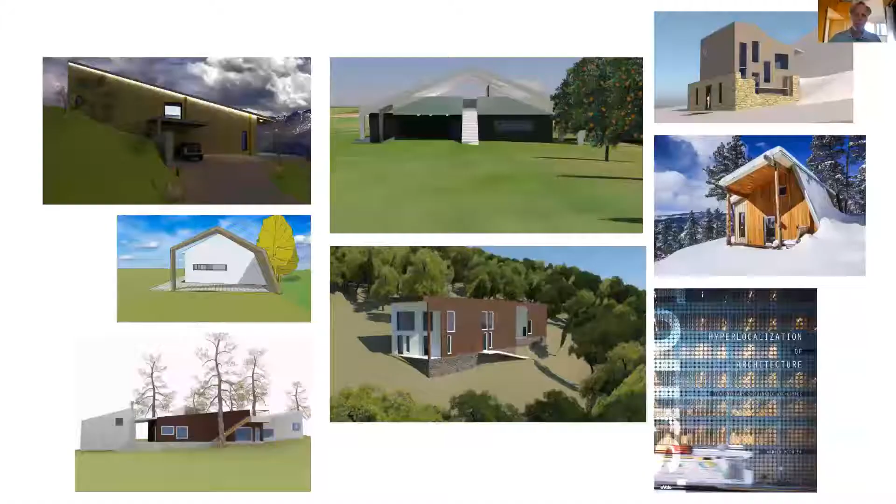My firm's called Hyperlocal Workshop. Some of the work I've done is mostly in the residential area. I'm working on projects from New York to California and Colorado. Happily, they're all certified projects, and all the clients are extremely keen on not just certification, but the quality of the building themselves and the quality of the space. So we look to have a really well-rounded, aesthetically significant type of design. It's experimental, but very much based on place. And Passive House works very well with that, of course, because it's so climate interdependent.

I also wrote a book called Hyperlocalization of Architecture that was published maybe 6 years ago. It's available in Europe and just about anywhere in the world. And it's also a book on global projects around the world, specifically around the idea of hyperlocalization of architecture, which means how does contemporary architecture work with both the culture and the place, both environmentally and aesthetically and functionally.

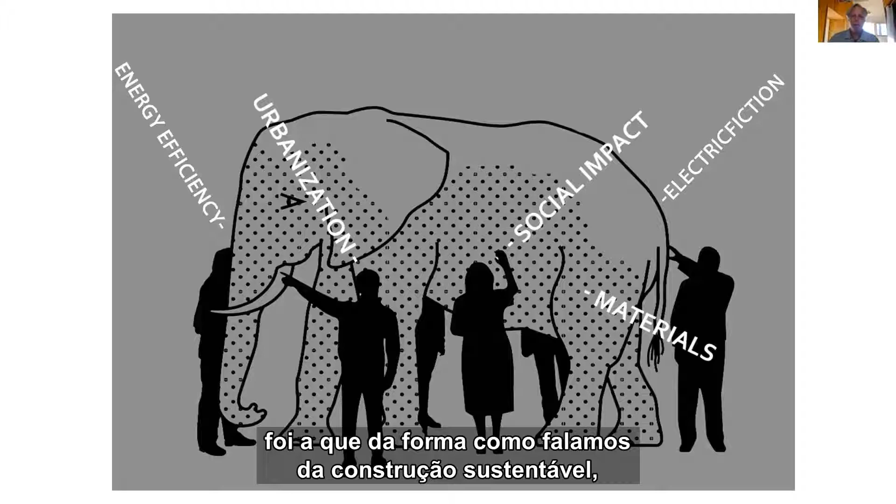And one of the things I've learned over the past few years was that the way that we talk about what we call sustainable building, green building, resilient building, all these terms are often based on very specific terms that are near to perhaps our own professional goals or professional needs. But buildings are really quite complex. Cities are even more complex in the integration of buildings and cities and in places.

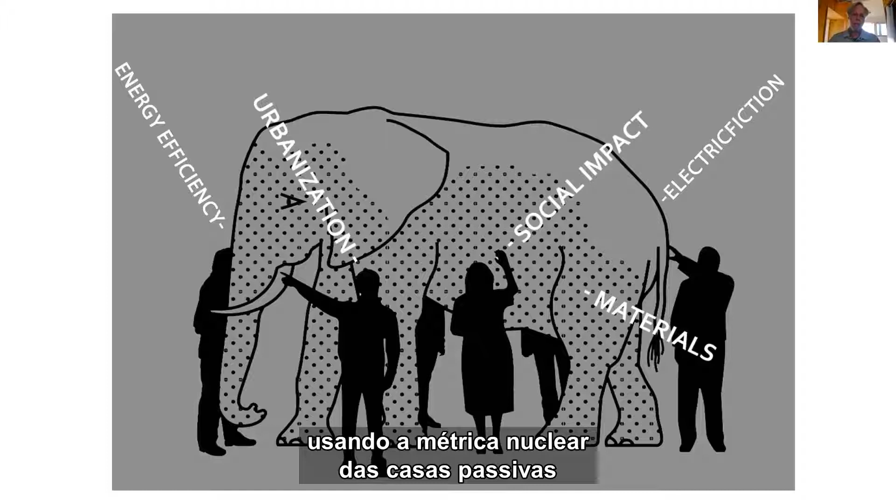So the way I want to look at talking about buildings in this talk is a broader sense of what building design does, using Passive House as the core metric, as well as carbon. Passive House, even though, as we know, it's an energy standard, it covers significant other things around the health and well-being of occupants. But the social impact, the idea of urbanization, density, the materiality of buildings is just as critical.

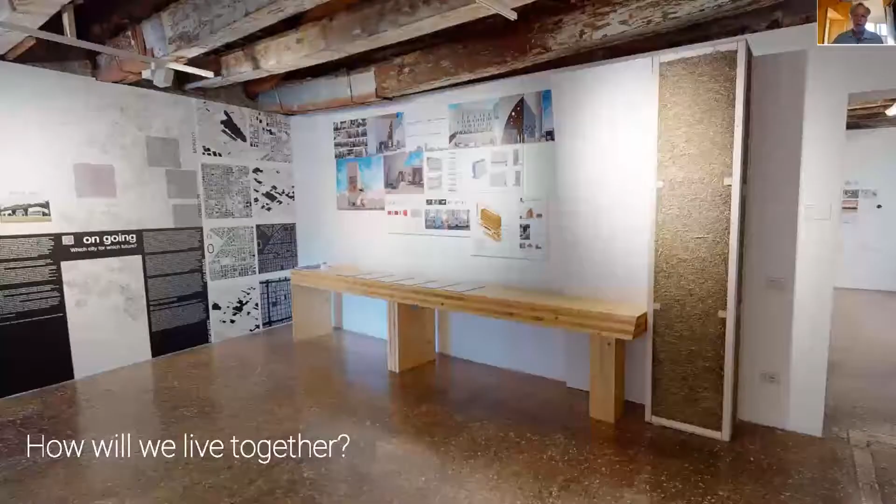And the project that I'm going to present on is called Temporal House, and it's part of the European Cultural Center's Venice Biennale this year. I've been working on it for a couple of years, and this is a photo of the installation in Palazzo Mora in Venice. And the Italian Architecture Biennale theme of 2021 was, how will we live together? That was the question. And my question back was, where will everyone go?

And to frame that, this very well-written ProPublica article goes into the story of climate change and how it's affecting migration in Central America and forcing people to move north due to the change in the climate environment where they live. And I'll read this quote, for the context of where will everyone go and how we design buildings for them.

By 2070, the kind of extremely hot zones like in the Sahara, that now cover less than 1% of the Earth's land surface, could cover nearly a fifth of the land, potentially placing 1 of every 3 people alive outside the climate niche where humans have thrived for thousands of years. And that's the reality that we have to design for.

Many of the buildings that we're designing now and building now will be here in 2070. So keeping that in mind, what that social impact will be should be very much a part of how we think about what we are building. And in this case, I was thinking very much about Los Angeles.

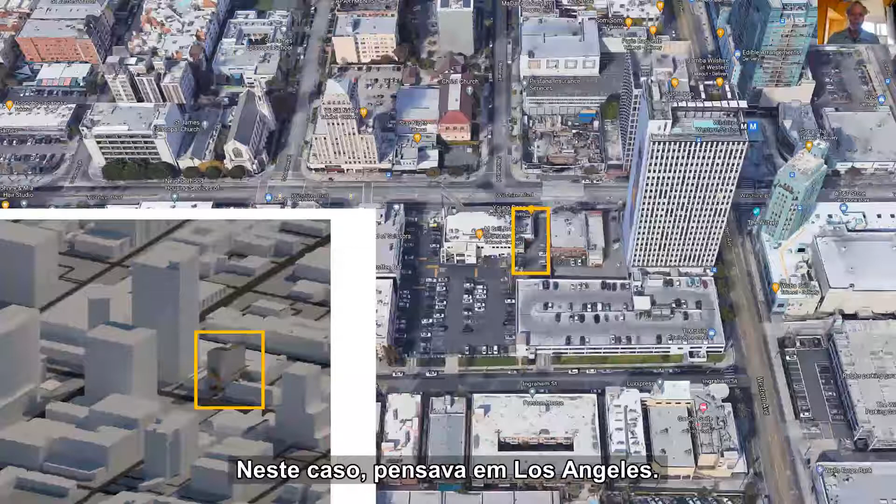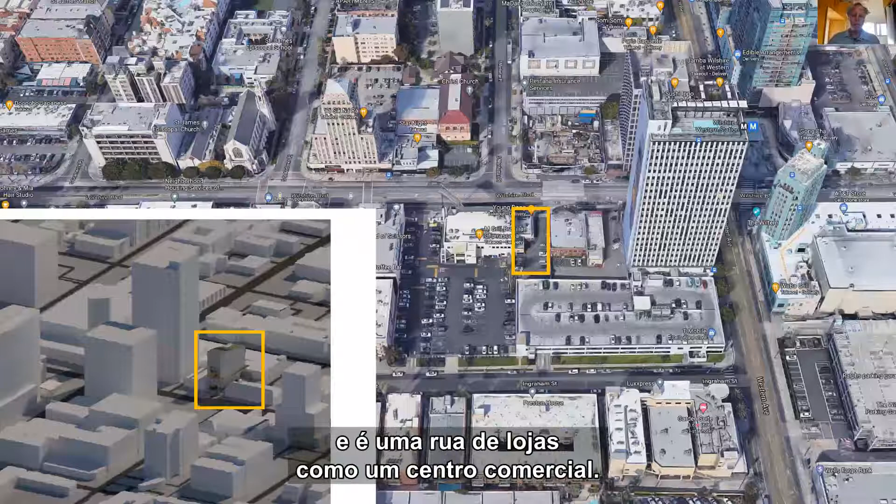In fact, my publisher for my book was just down the street on Wilshire Boulevard. I got quite fascinated by the street and walked it quite a bit. I did quite a bit of research on it, and it turns out to be the original strip mall, the invention of the strip mall in the Americas.

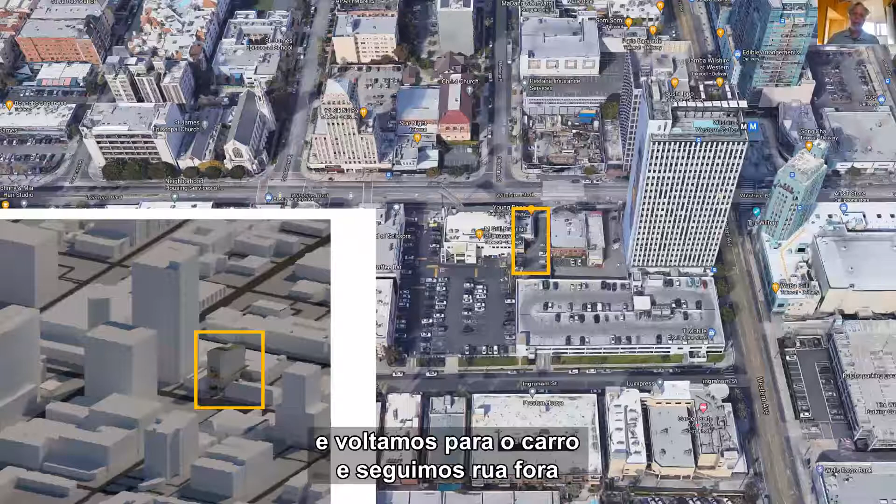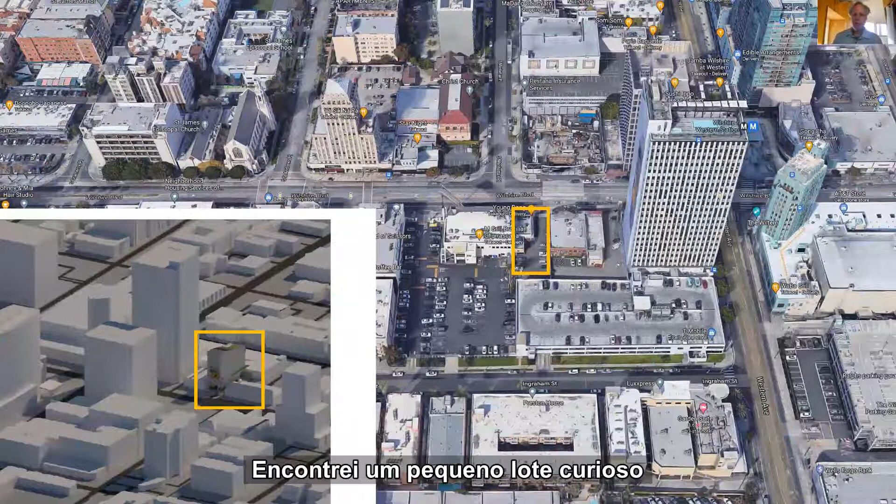And strip malls, of course, were car dependent, where you go to park your car in front of a business, get your materials, your groceries, and then jump back in your car and go down the road again to the next business. So we're reclaiming Wilshire Boulevard back to a pedestrian place, a place for people again. So I found a funny little lot as a proposed site for this project.

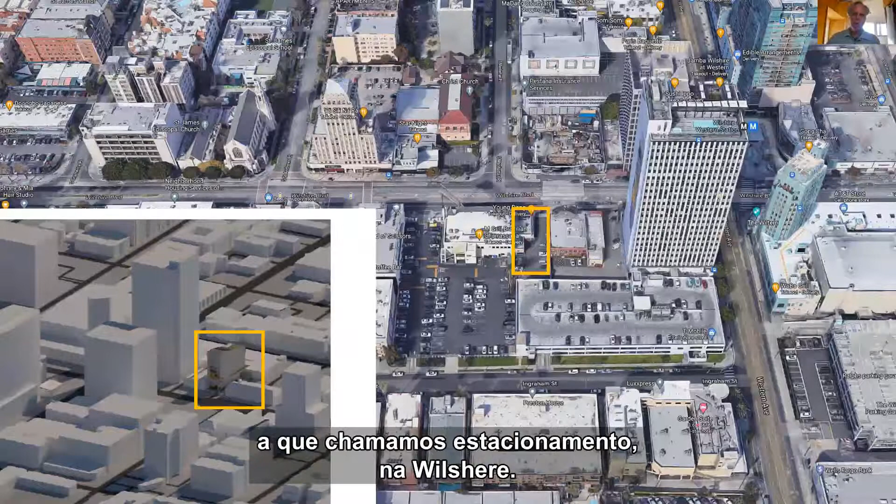It's a multifamily project. It's near the metro. It's near downtown. And there's, of course, lots of tarmac, what we call parking and concrete, on Wilshire. So it's about reactivating that space again. And the place I started from is rethinking what a 21st century shop house would be like.

Traditionally, especially in Southeast Asia, but certainly all around the world, many people came to live and have small businesses within a single building, often the storefront, and then living in the back, sometimes multiple generations. It was a compact way to integrate the socioeconomic process of integrating into a new place for many generations past. So the idea was how to design a building to work with that impact.

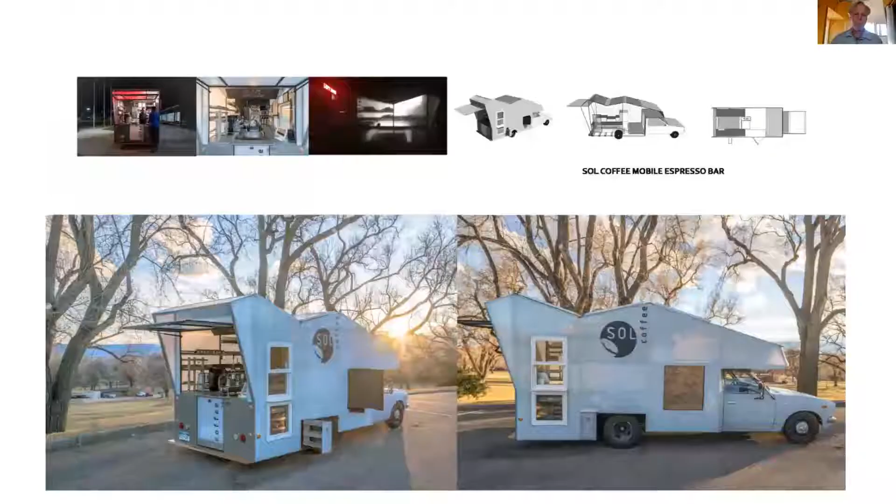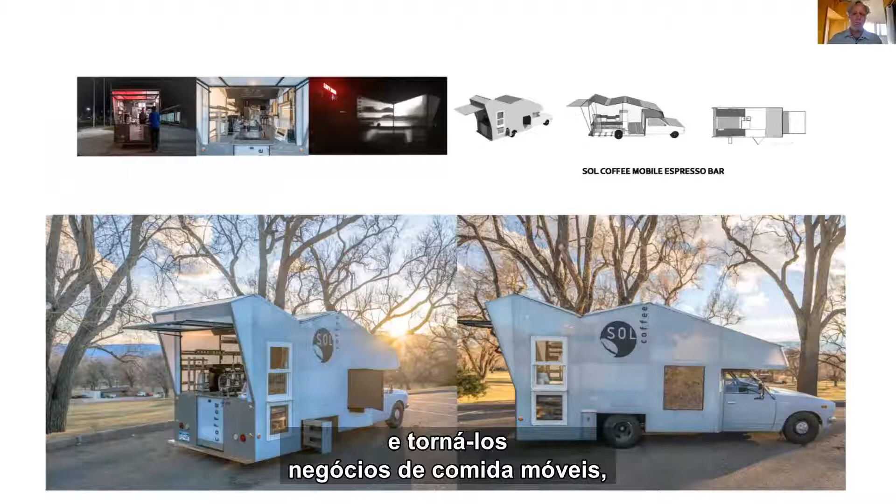And then I was very inspired by a couple of trips to Japan, specifically Kyoto, and the form factors there, which I found quite elegant, especially on the street side. The other thing I was very inspired by, something I've seen lots on Wilshire Boulevard and in Los Angeles in general, is the food truck culture, which is basically taking the brick and mortar and turning that into a mobile food business, which is much more realized for people from different socioeconomic strata.

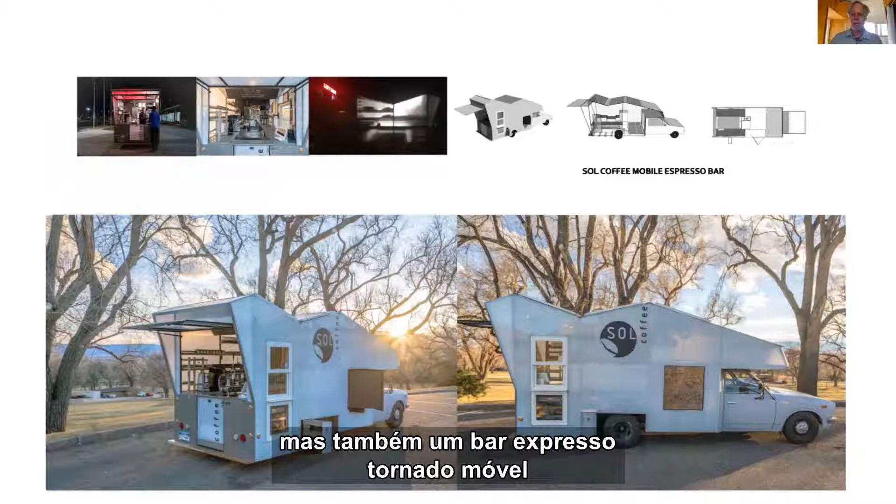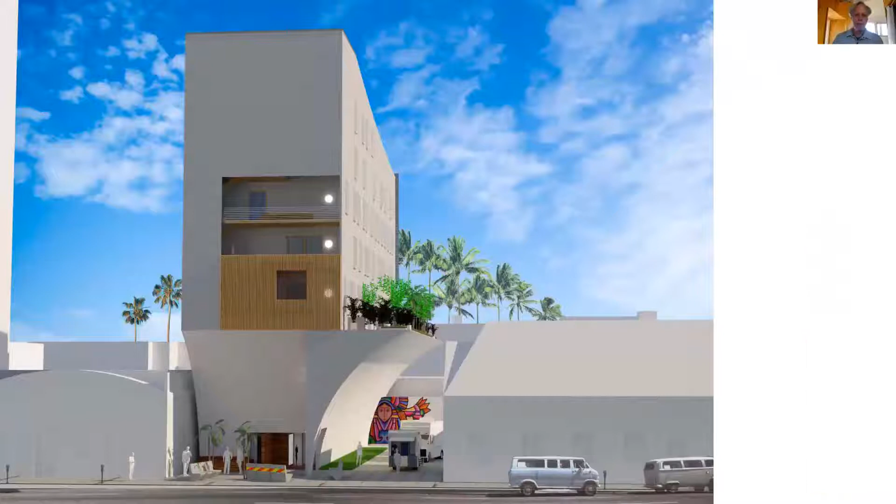So we designed and developed a small food truck that won an architecture award, which is great fun, but is basically an espresso bar. It's mobilized and solar powered. And I'm having a lot of fun working around the idea of mobile micro businesses. So the idea was to integrate those concepts into a multifamily passive house in Los Angeles.

The building we're looking at is 8 stories. I'll go a little bit into the program later, but this is the general impact it has on the street side, where it's much more perforated than the architecture typically is. So it's opening up, inviting people in from the street into the place to enjoy.

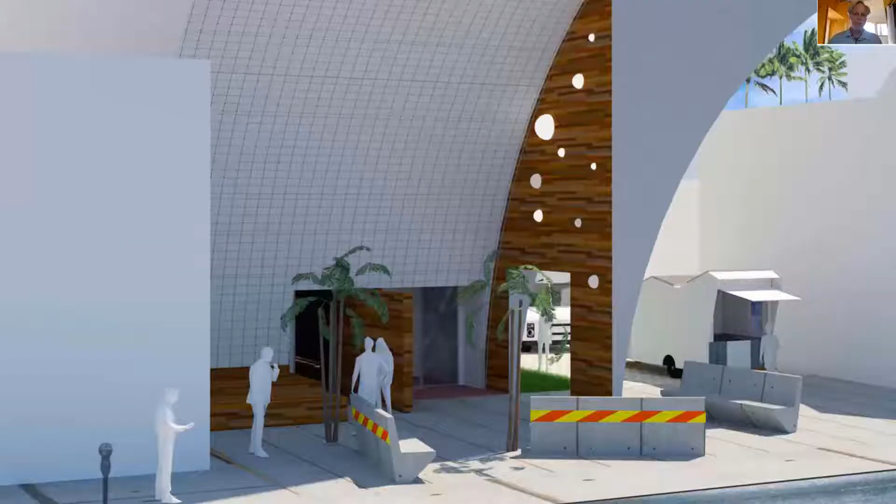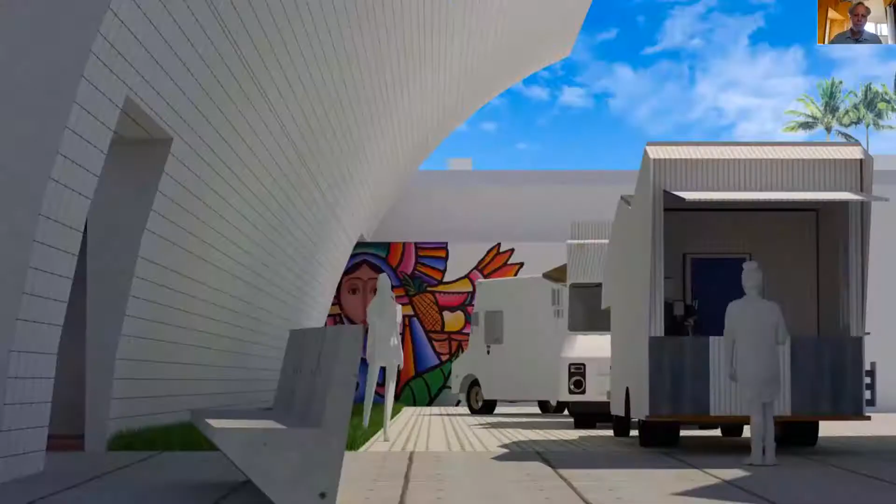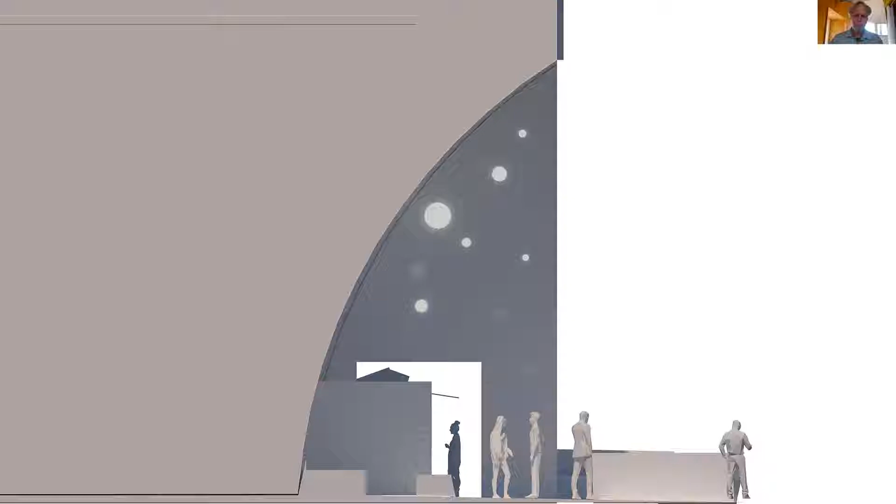That very much is about activating the sidewalk scene and giving people a place to sit, to congregate, to enjoy themselves. And then further alongside the building is a place for food trucks to gather, and a protected place for people to both wait in line for their food and to sit and enjoy it during lunch, during the evening. And here's an aesthetic section of what the space looked like.

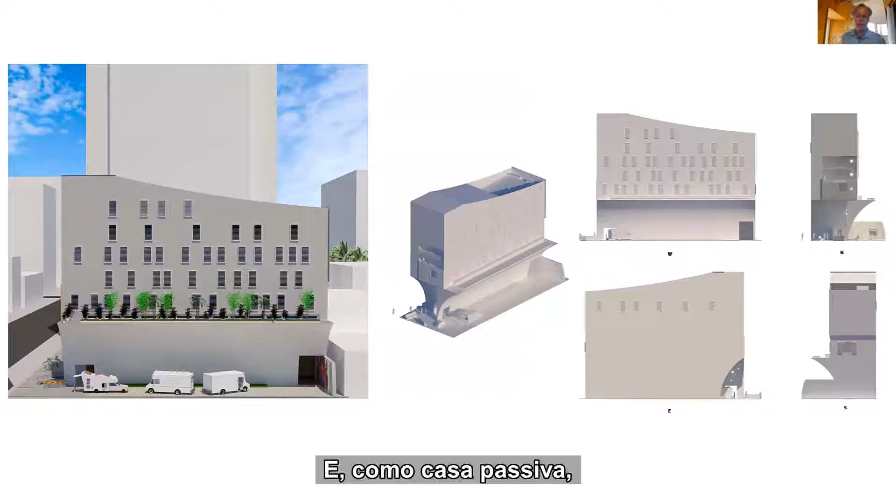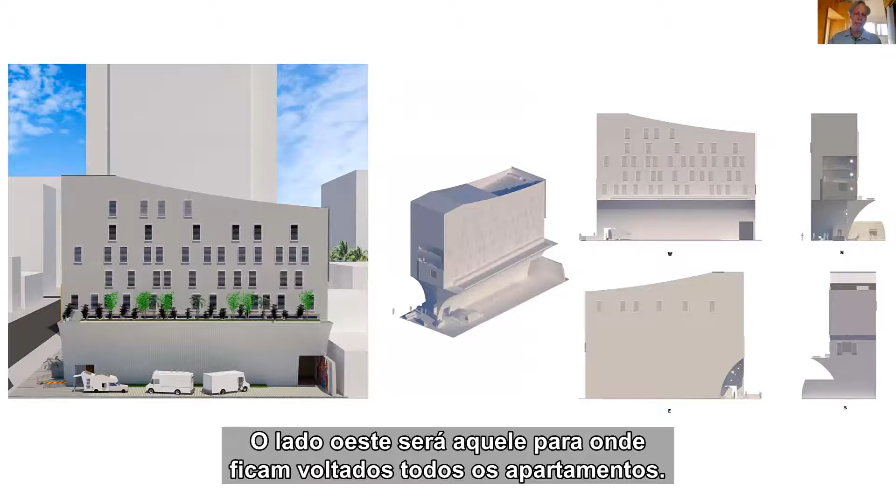As a passive house, of course, one of the first issues we have to deal with is orientation. Los Angeles is a hot, dry climate, and I chose a lot that was actually less than optimized, let's say, for a building such as a passive house, especially with the solar heat gains. The west side is actually where all the apartments will be facing on the 4 stories of apartments. It has about 29, I believe, apartments in total.

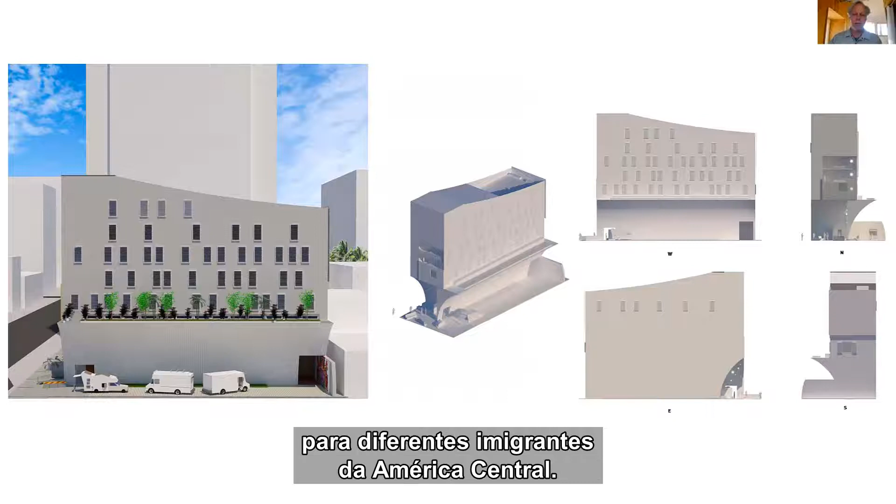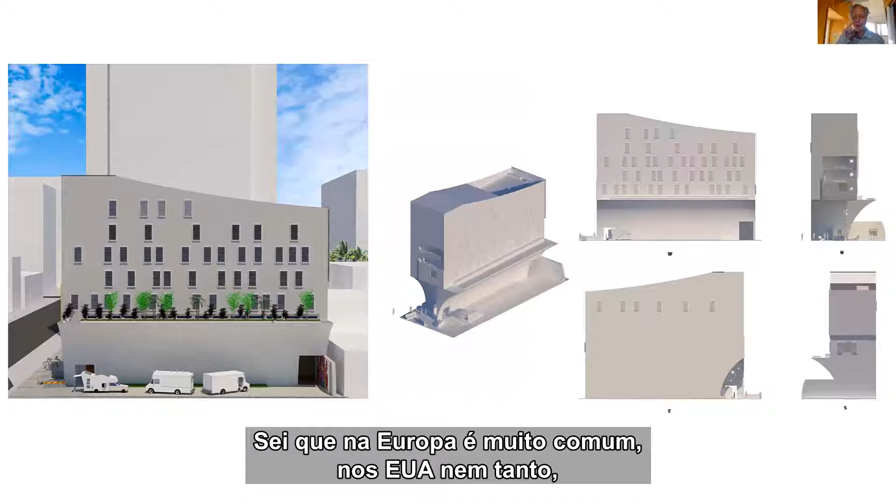And they will be reserved for different immigrants from Central America is the idea, from single people to families. From the orientation point of view, since we're facing west, we had to be extremely aggressive on the shading on the exterior, which I know in Europe is quite common. In the United States, it's almost unheard of to do exterior shading. So that was a critical component to the functioning of the building.

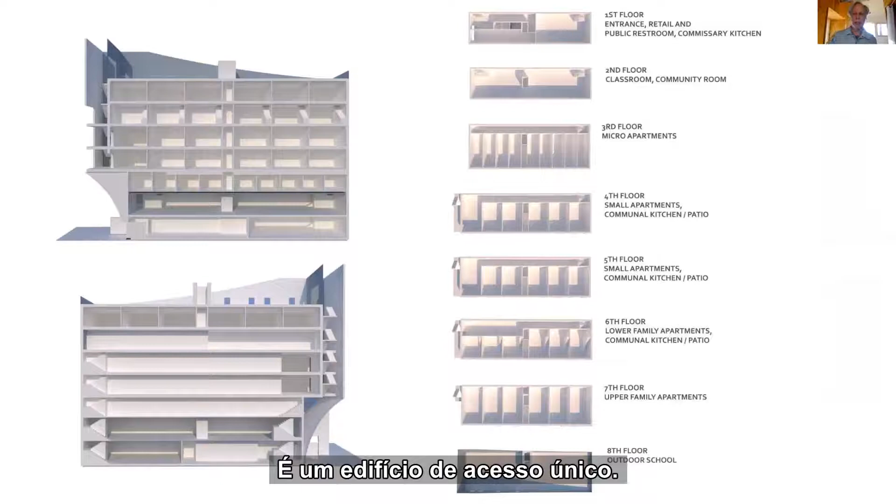The good form factor, of course, is also critical to the building. So compact, simplified; even if it has some elaborate projections from it, the core building itself is somewhat simple. It's what we call a single loaded building. That means that it has one hallway on the side, in this case the north side, and then a single row of apartments.

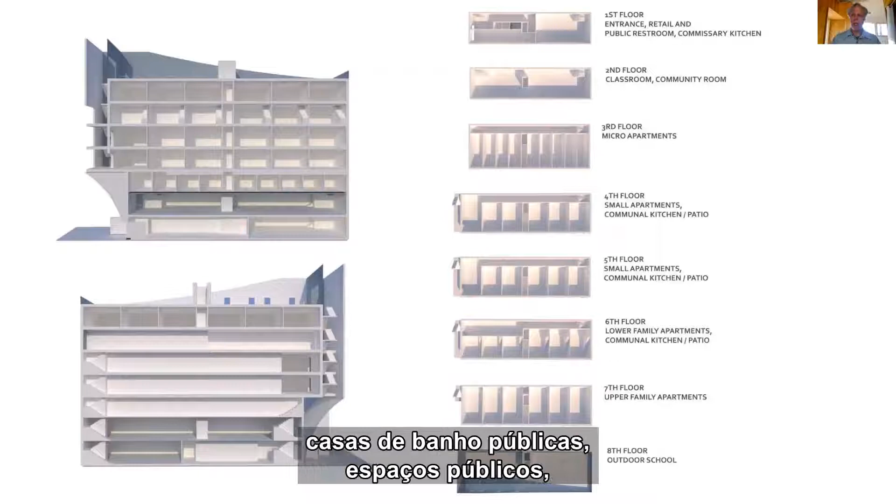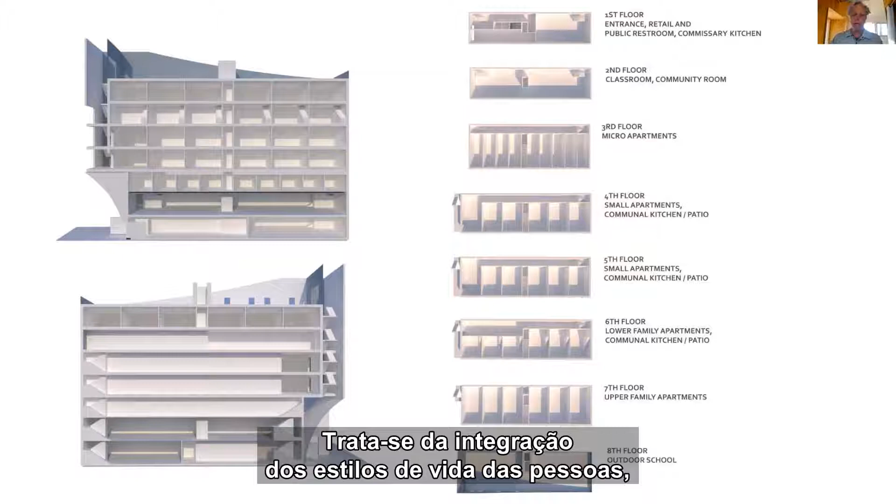The first floor is actually a commissary kitchen, public restrooms, public amenities, perhaps a small bar, things like that. The commissary kitchen is a place for people inside the building to either support the food trucks or to run their own food businesses, catering businesses, things like that. So it's very much about the integration of people's lifestyle and work into Los Angeles and providing them an economic means as well.

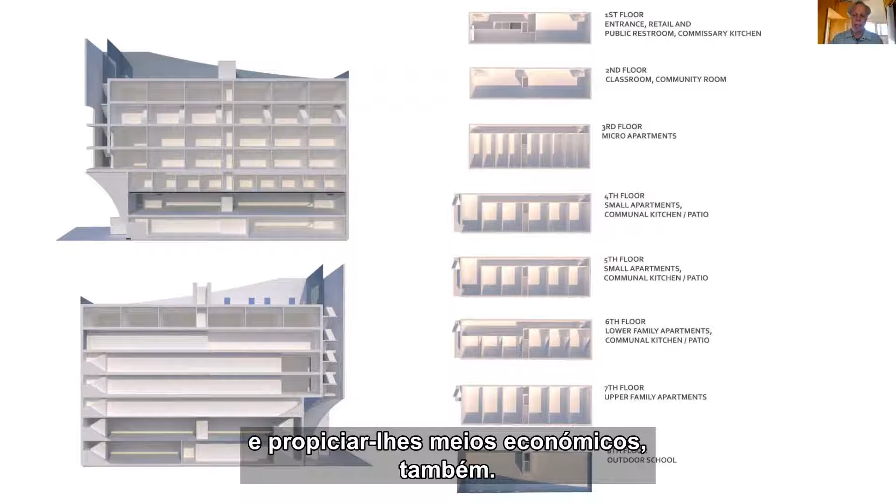Then micro apartments, small apartments, multifamily apartments with multiple floors, and then finally an outdoor space on top, which would be great to use as a school, a place to maybe even grow vegetables, in an adaptive program over time.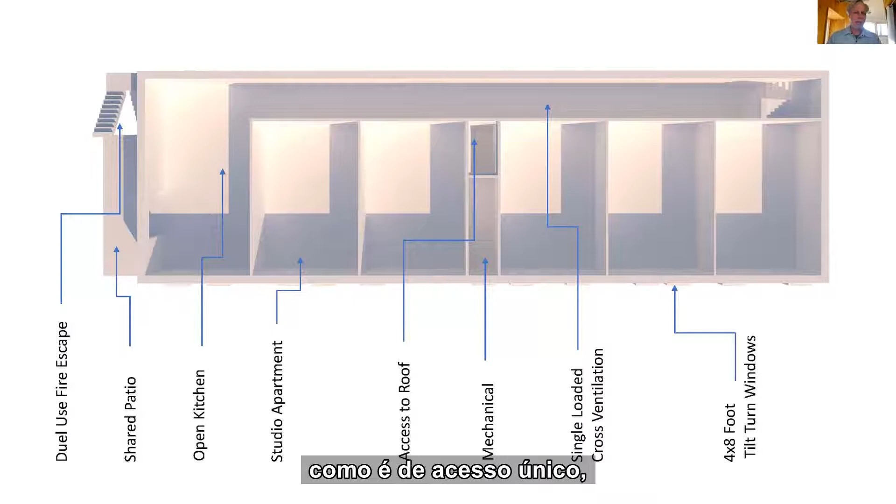To give you a sense of what the floor is, especially in the sense of passive house, because it's single loaded, we can easily provide cross ventilation in each floor from the hallway into the individual apartments. The apartments have, in Imperial, 4 by 8 foot windows. They're tilt turn, of course, so they open, so they're kind of de facto balconies in that sense.

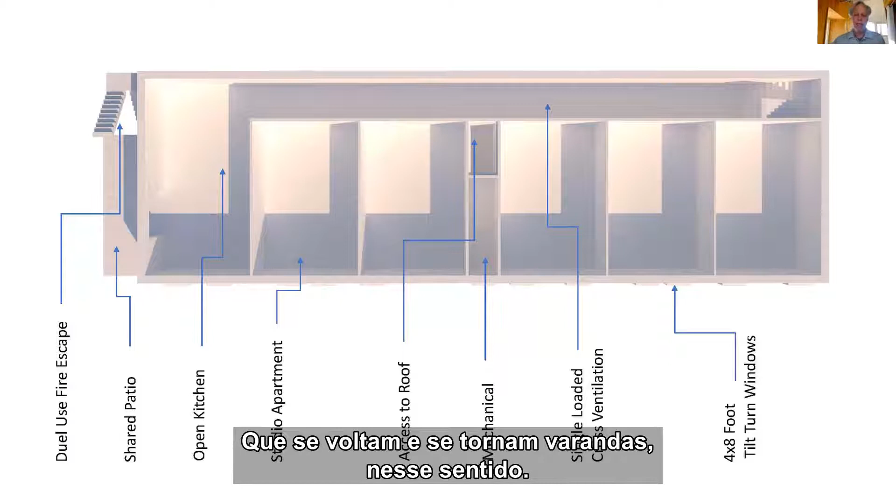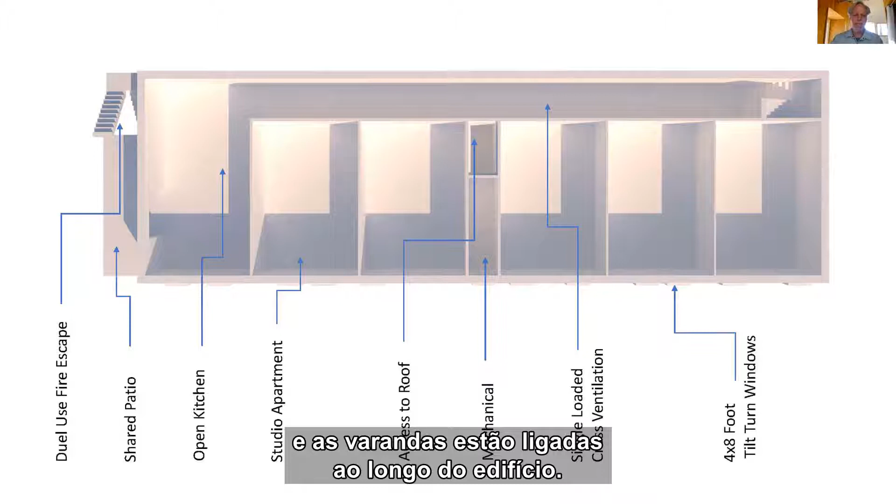The elevator shaft will give access through the building and to the roof. The mechanical is right behind the elevator shaft. The mechanicals, I have another slide that goes into some detail on that. Open kitchen, the floor plan also has an open space on the street side, so the balconies are connected throughout the building, and then shared kitchen spaces and different size apartments, as I mentioned.

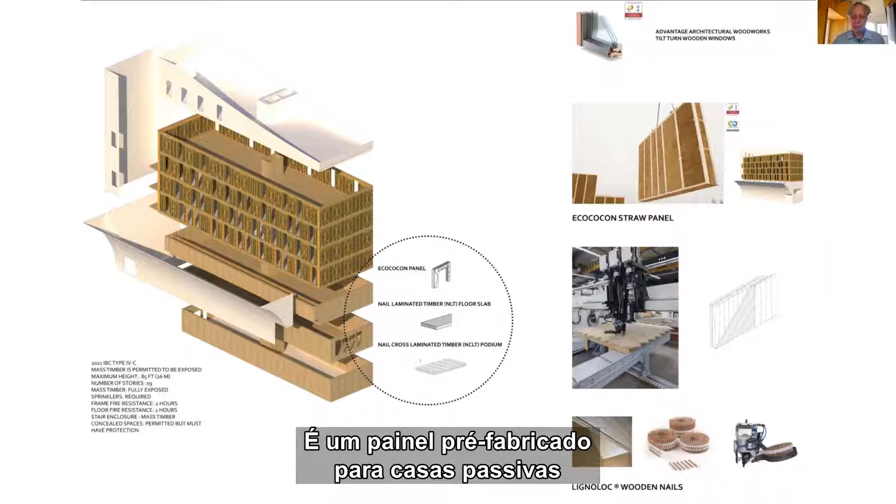On the carbon side, on the material side, the proposal is using a straw panel system. It's called EcoCocon, and it's a prefabricated passive house panel. And then the podium underneath is made from cross-laminated and nail-laminated timbers. In this case, we're using a product called Lignoloc, which is a wooden nail.

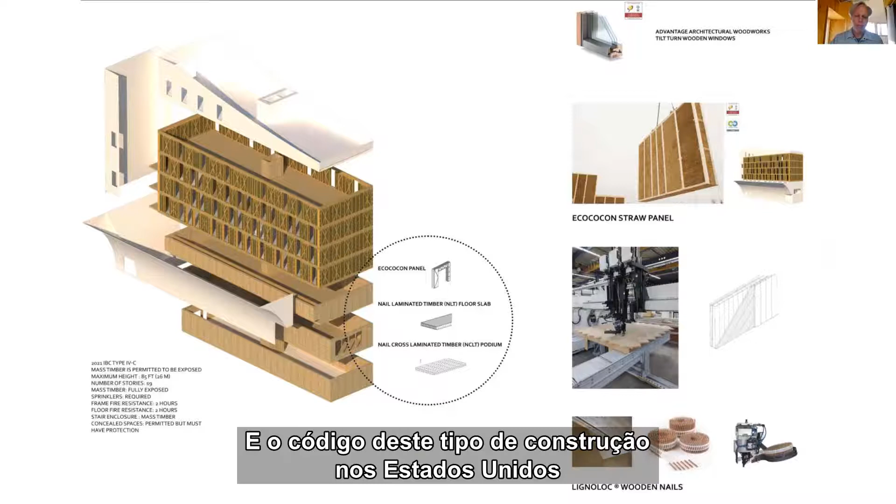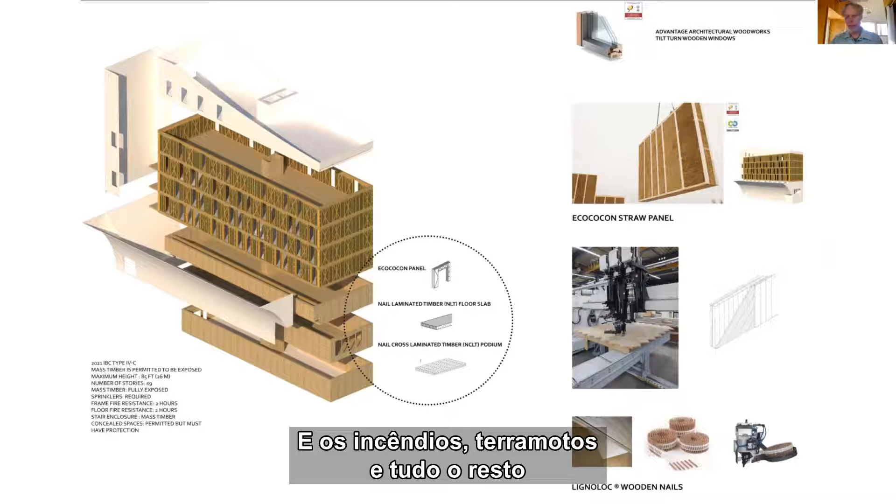And this actually passes code in the United States, this type of construction now, as of just this year. So we can build up to 8 stories in all timber, which is really fantastic. Also, fire, earthquake, all those other things are considered a part of the code at this point.

The EcoCocon panel actually, because of the density and the silica in straw, is quite fire resilient, and that's the first question people often have, is that straw must burn, but in fact the wood burns before the straw does, because of the compactness of the way that straw is packed, and because much of the material is indeed not supporting flame. So it's also quite earthquake resilient.

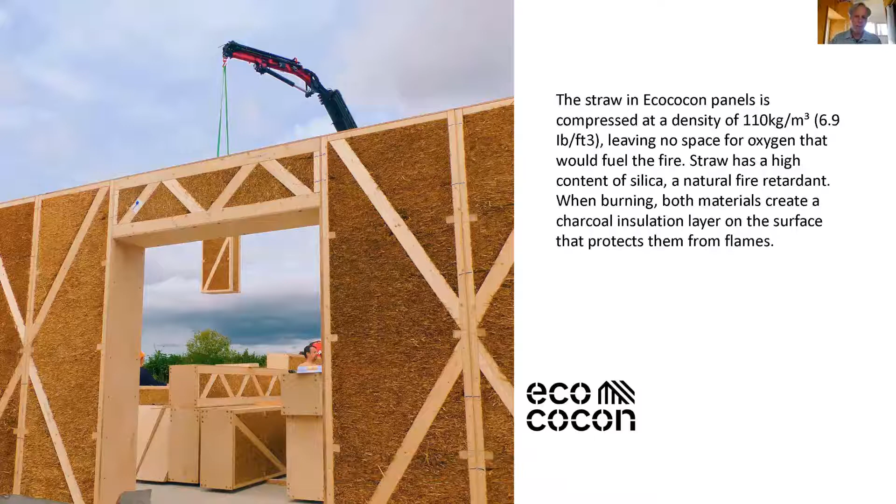It stacks quite well, so it's fundamentally a carbon positive and very durable, robust building system for passive house, especially even at scale, which is very much the idea of the low carbon building movement.

On the timber side, the podium, which is earthquake resistant, is this product that's being developed by Beck using these wooden nails that they created, which you can build in small scale shops, even using automated systems using wood nails. We also don't need to use glues, things like that.

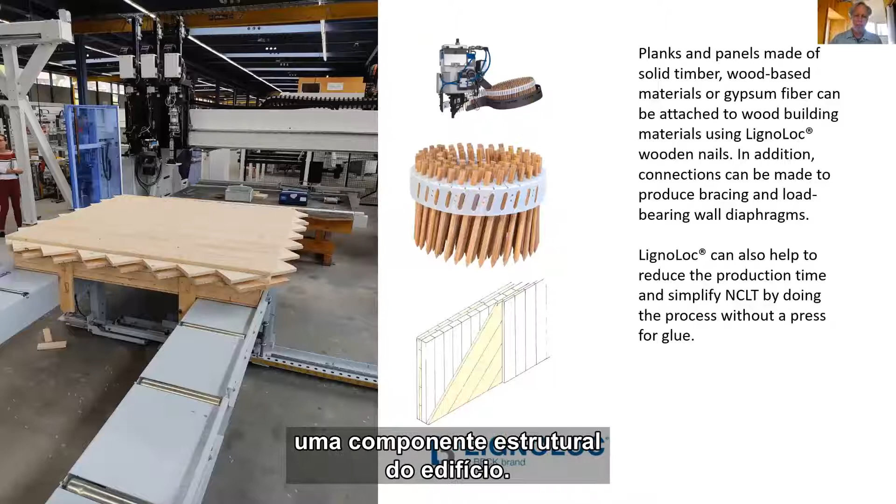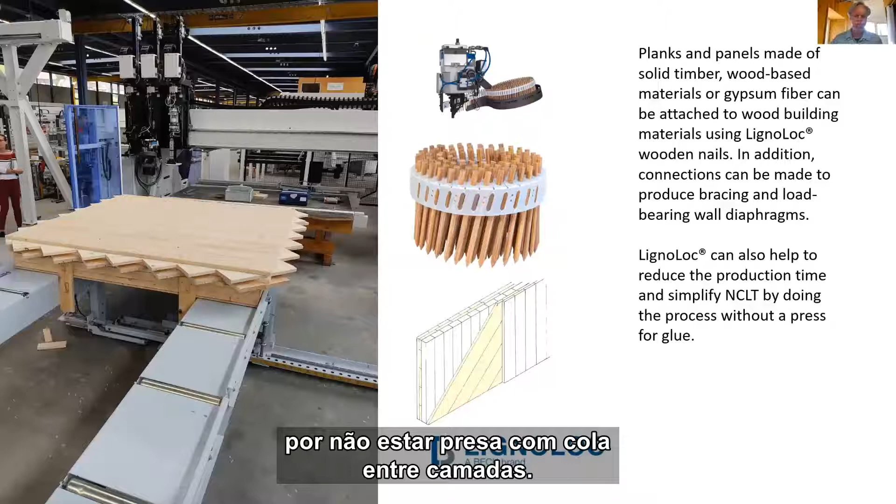So it's quite a strong, robust product, structural component to the building, but also earthquake resilient and something that we can easily deconstruct over time because of the lack of glue and fasteners within the slabs themselves. So that's the core of the building. Very much the mechanical systems are on each floor to simplify it.

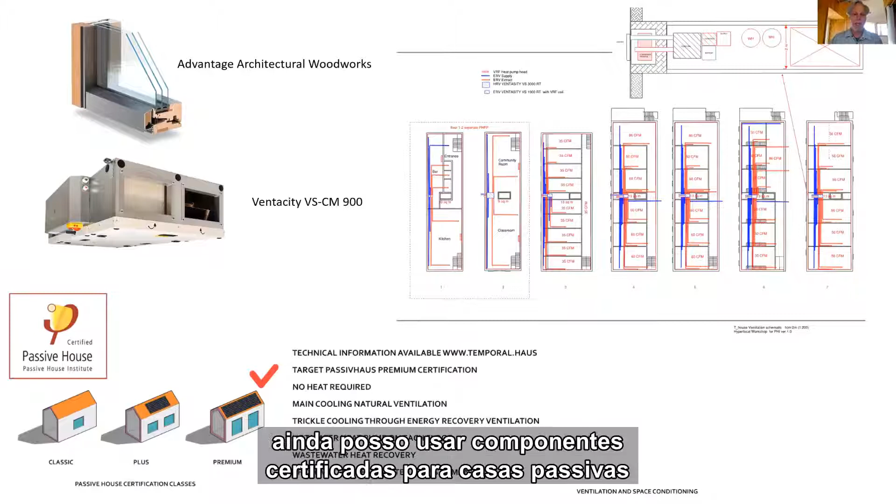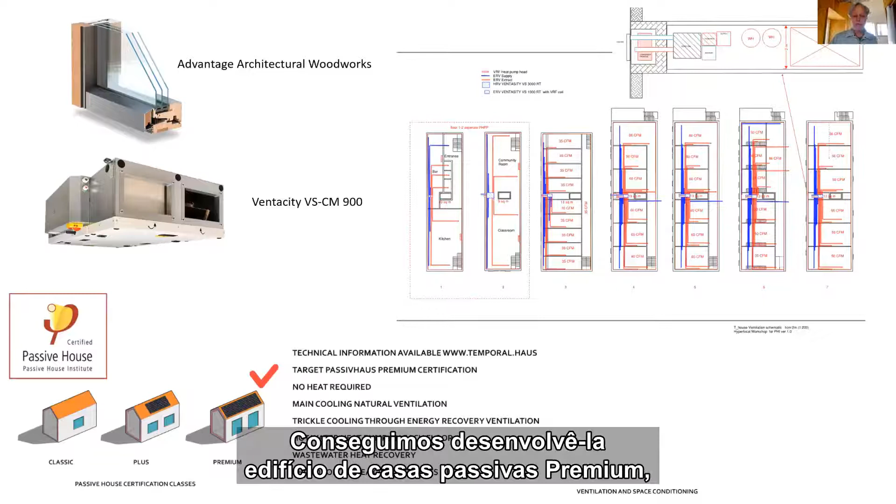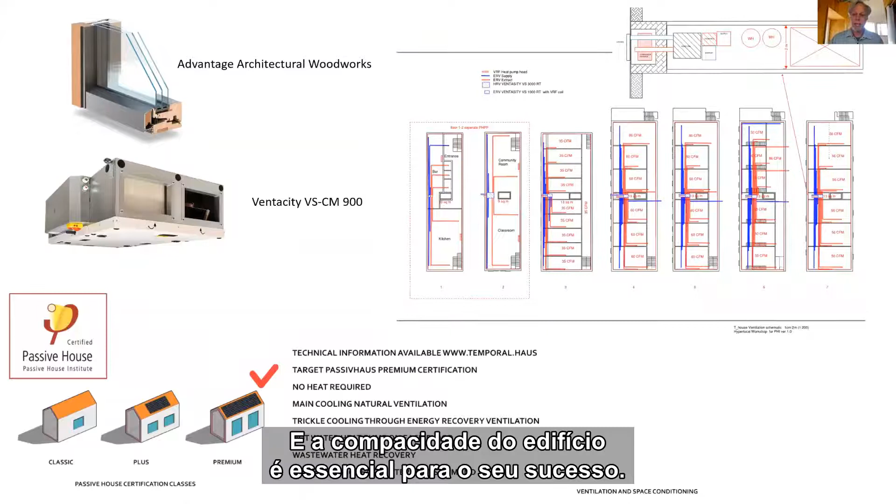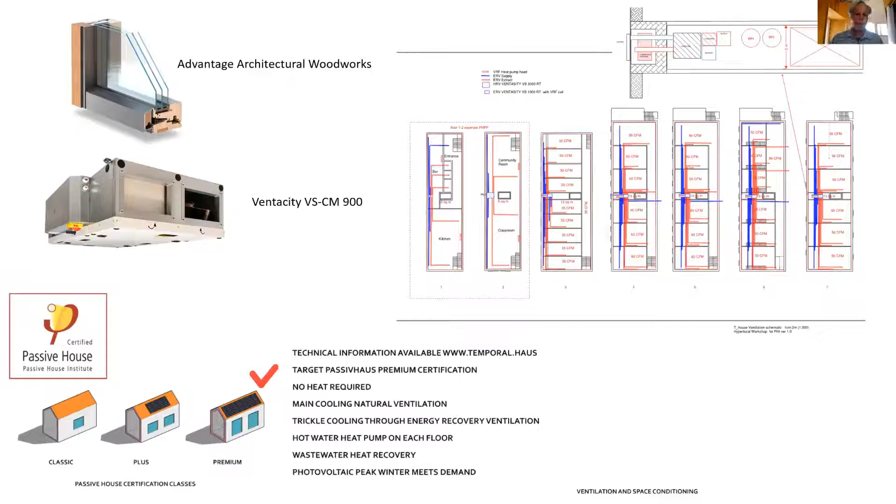I can still use components that are certified Passive House that are now made in the United States, including our ventilation system, our windows. We were able to develop this as a Passive House premium building with the help of the Passive House Institute in the energy modeling supporting that. And the compactness of the building is quite key to its success, especially in these more narrow urban lots.

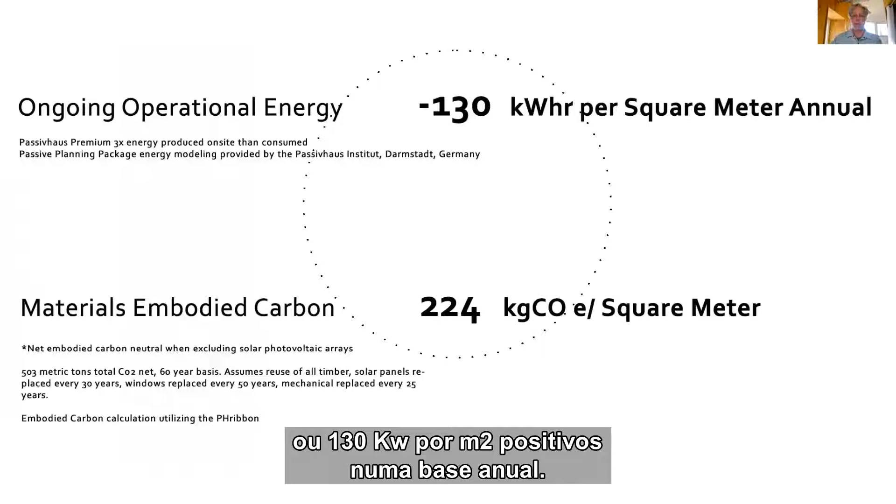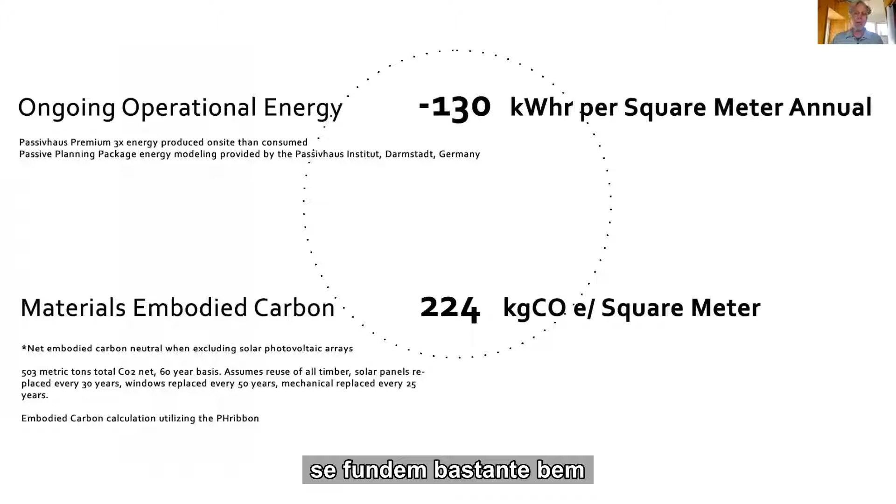Now, the carbon question, I'll get in some detail about how we dealt with carbon with the building. Our ongoing operational energy is minus 130, or say a net positive 130 kilowatt hours per square meter on an annual basis. And that's due to the Passive House premium certification process using the primary energy renewable system, which is very much about both the renewables and the footprint of the building and the building density. So this is a good example of how renewables and density merge together quite well into a Passive House system.

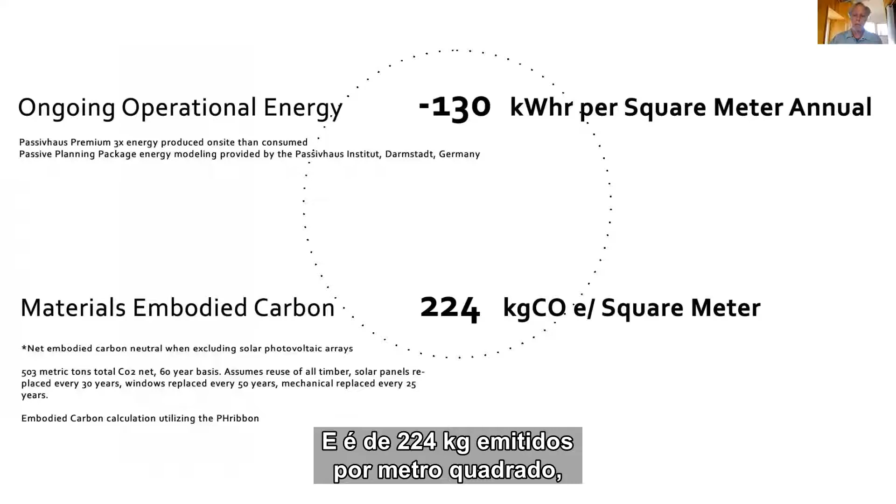And then the embodied carbon, I did some work on developing calculations for the embodied carbon. And that's at 224 kilograms emitted per square meter total for the construction of the building.

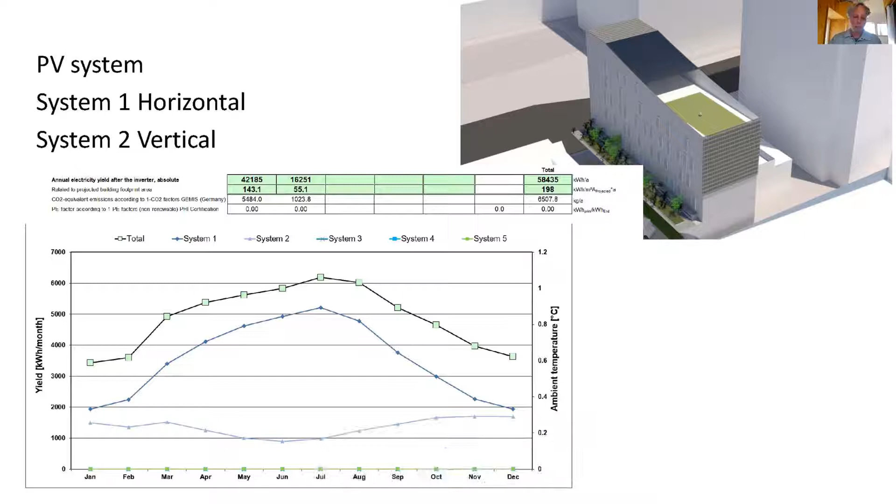On the PV system, it's very interesting that, of course, in Passive House, we like to not think about net, but in real terms of energy usage. So in production, we have to be as aware of the lowest time of energy production, which is typically in the winter, as we are of peak. And I found it interesting to see that in this particular use case the horizontal panels in summer peak quite a bit of energy, but the vertical panels in winter provide almost as much energy as the horizontal system does.

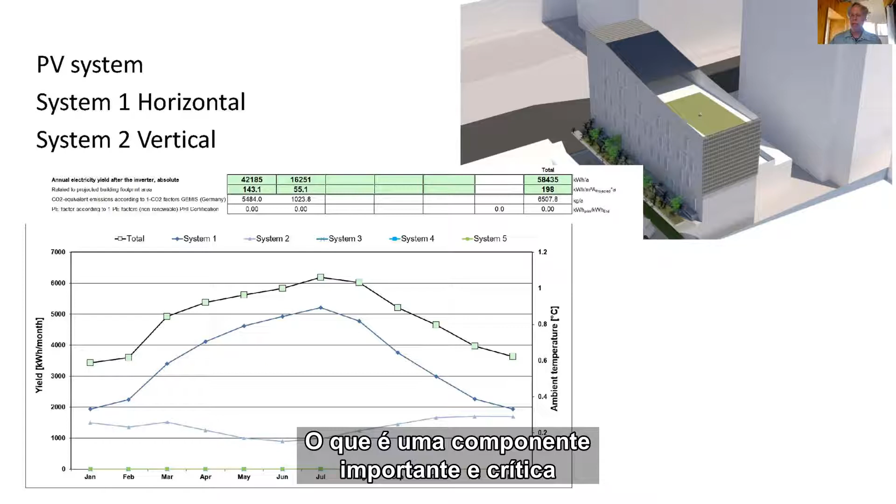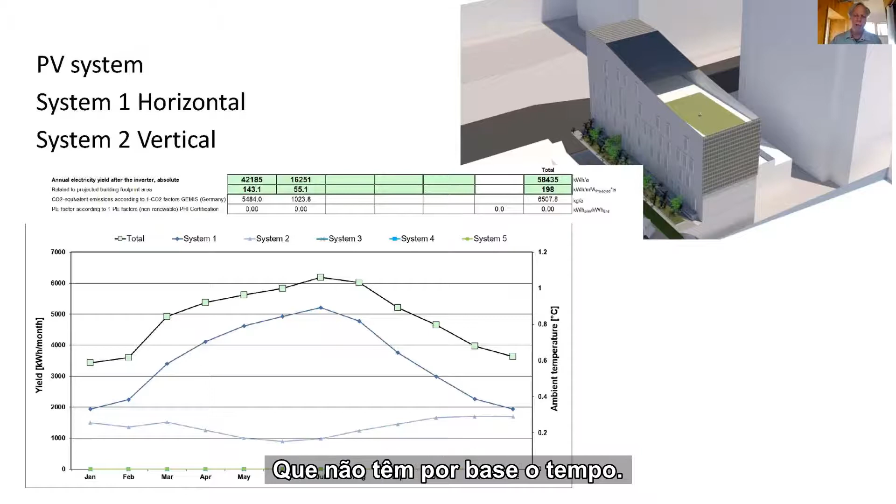So overall, when we look at our peak demand needs, they are well balanced with our production in the wintertime, which is an important critical component of the energy production in Passive House, which is well beyond what we talk about when we talk about net zero buildings, for instance, which are not time-based. And here's the verification chart.

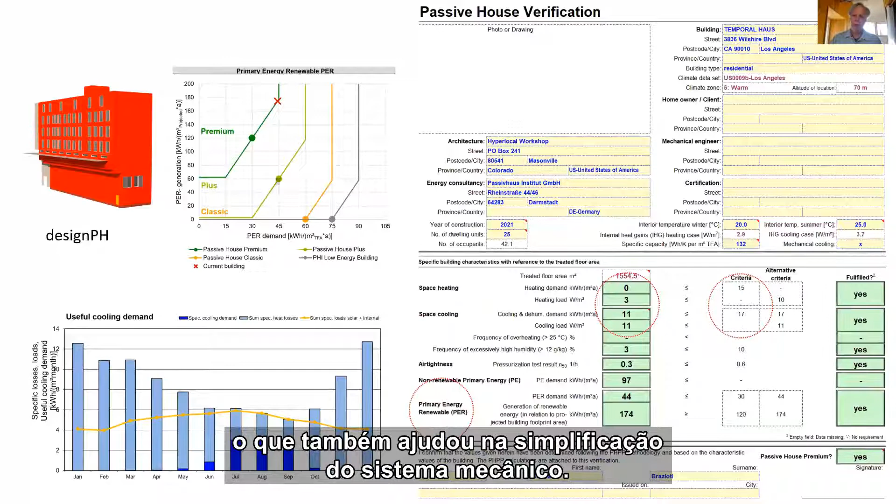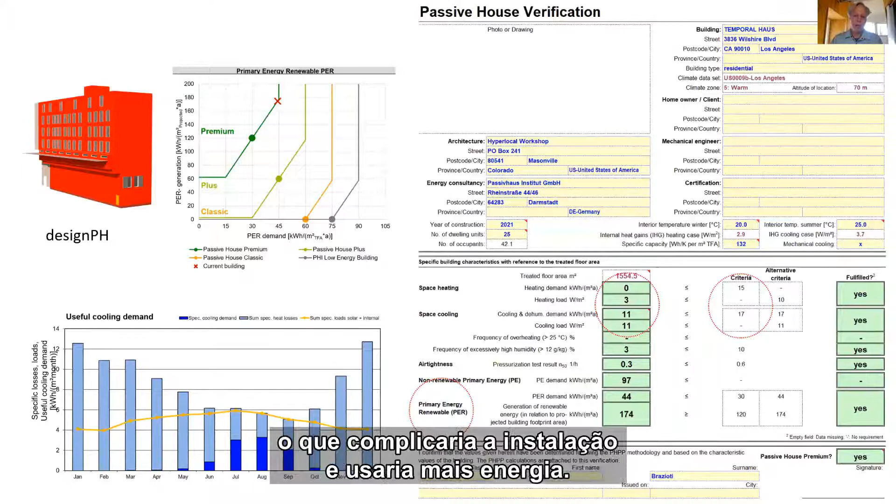It was really very satisfying to see that we could develop a building that didn't actually have a real heat load need. It was just a cooling load, which also helped with the simplification of the mechanical system, for instance. In fact, I found that putting in just double pane windows raised the heating demand quite a bit, which would complicate the installation and use more energy.

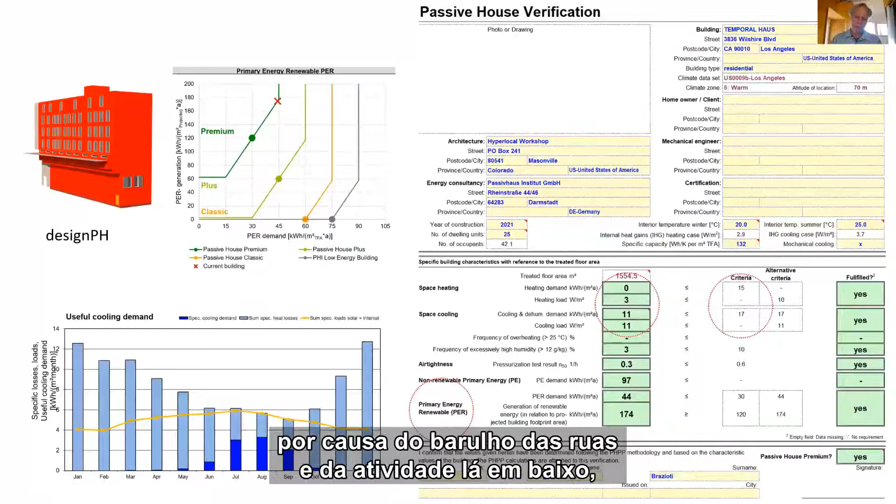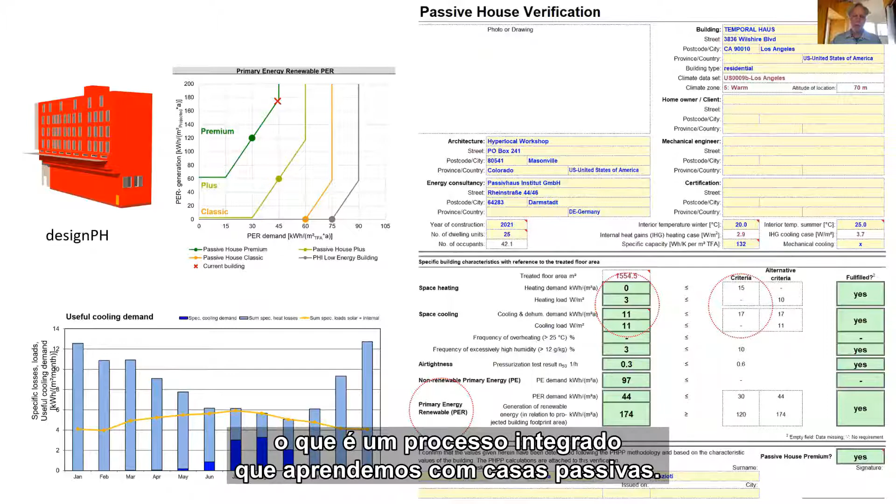So we were using triple pane; even in Los Angeles it works quite well, because of the street noise and all the activity down below, but also because of the quality of living inside, and because it simplifies other parts of the building, which is this integrated process that we get to learn from Passive House: how windows affect mechanicals, how it affects quality of the environment, from sound and acoustics to temperature, things like that.

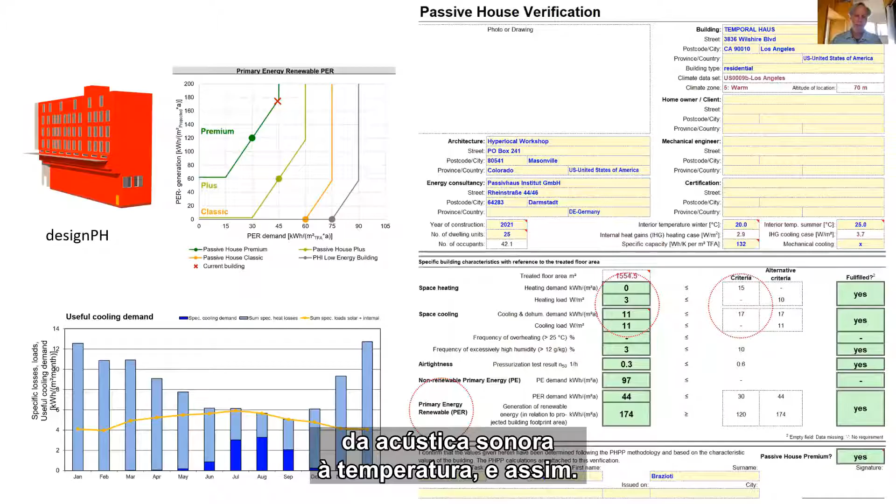For the carbon calculation, I used something called the PH Ribbon, which is a plugin for the PHPP that uses the RIBA's methodologies for carbon. And it's really important to understand, especially around the question of embodied carbon, that there's a lot of assumptions that can be left out. So finding out what a true carbon number is can be quite nuanced.

First of all, it starts with the materials. Timber and the straw, of course, are significant long-term storage. Straw has a renewable rate on an annual basis. Timber is much longer, up to 40 to 50 years to reclaim that carbon, so you have to replant forests. And also the materials at the end of the building's use cycle, if we just burn the materials or bury them, they can easily go back into the atmosphere again. So that's accounted for as well.

So the idea of deconstructibility, to be able to reuse these materials, to at least design and anticipate the reuse of carbon materials in the building, is very important. Similar to beautiful old brick or stone buildings or the mass timber buildings of centuries ago, much of that material can be reused over and over again.

And what also is very surprising is that the solar electric system needs to be replaced every 20, 30 years or so. So on an ongoing basis, along with mechanical systems, things like that, that has an impact on the carbon footprint of the building over time. And then the upfront cost.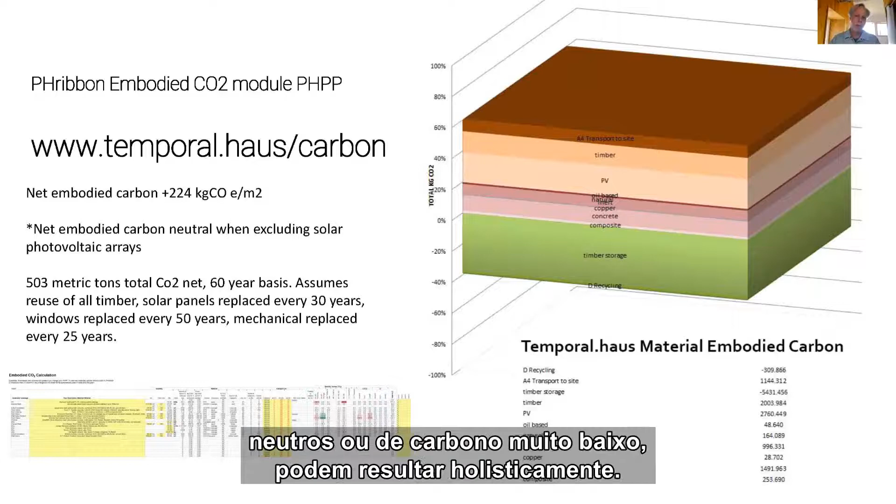And with that, I like to think of this project, for myself at least, as Passive House being a form of optimism in design, that it provides the critical pathways to really understand the true short-term and long-term impact of buildings, especially if we look for adaptive buildings that can work over time with minimal inputs. In this case, integrating an immigrant culture from climate change into a city that was built of immigrants. Most of our cities are going to be going through this radical transformation, if not already. Many of them are already stressed for housing.

So the idea that we can build buildings that are a net benefit, both socially and from the carbon standpoint, is very much based on following the metrics, being quite thorough in the way we design buildings. And for me, at least personally, I found that Passive House is extremely adept at that process.